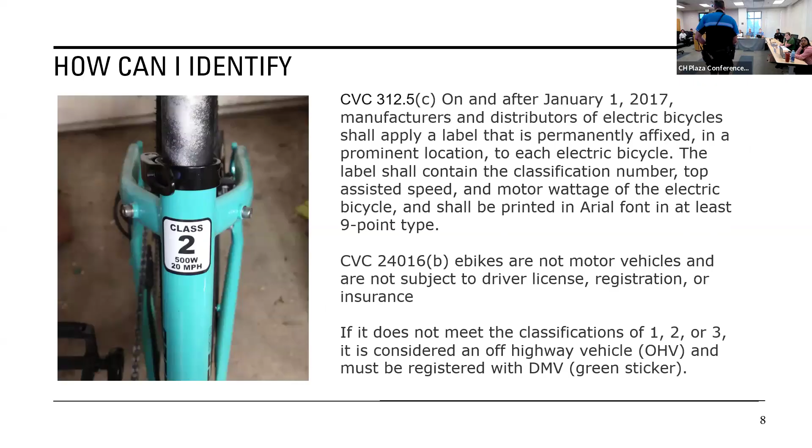We're also going to talk about the differences in where you can use these different bicycles. To identify them, the manufacturer is required to have a sticker on it. It has to be in that font, in a conspicuous spot, and it has to say what class it is, the top speed, and the wattage. However, these stickers are easily purchased online.

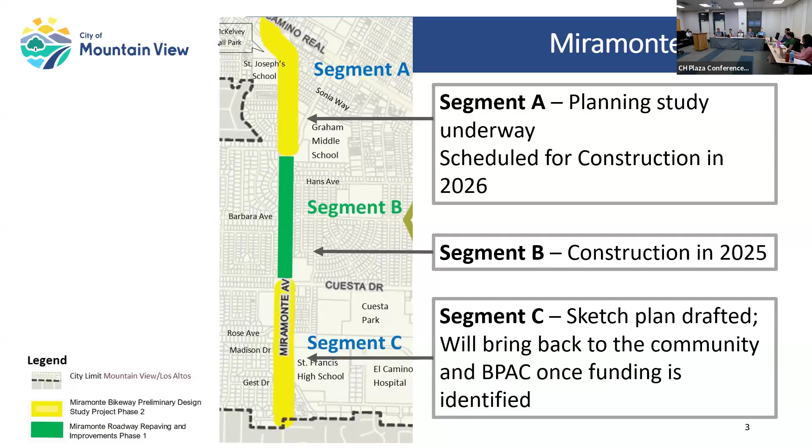Okay, next slide. Quickly some background: last year we kicked off the study with data collection and outreach round 1. Since then, we have completed preliminary concept design, data analysis, outreach round 2, and have developed a preferred alternative. Today we are here to receive your feedback on the preferred alternative, and we will take this to CTC on Tuesday for their feedback as well. Based on BPAC and CTC's feedback, we will bring the final report to council in fall of 2025 for approval.

and Bubb Elementary School. We kicked off the study last fall with outreach round 1 and data collection. For outreach round 1, we conducted a bike and walk audit, an interactive map survey, and hosted an open house. Through the outreach, we received valuable feedback and improvement ideas for this area. In parallel, we also conducted thorough data collection, which included traffic counts, speed analysis, traffic collisions, parking counts, and field observation.

Based on the data analysis, staff kicked off outreach round 2 during the summer. During this round, staff sought feedback on proposed parking removal, lane reduction from 2 travel lanes to 1 travel lane, and bicycle and pedestrian facilities along this corridor. For outreach round 2, we took these elements for public feedback.

Public outreach events included a citywide survey, pop-ups at nearby schools, and for notification of outreach, we sent postcards to residents, car flyers, yard signs, light pole flyers, and social media posts.

Through the outreach, we heard support for protected bikeways and pedestrian safety features. In the survey that is still open, results show over 55% support for the plan, and an additional 19% would support more protected bikeway. Of the respondents who were no or not sure, preserving lane capacity was the reason for not supporting it.

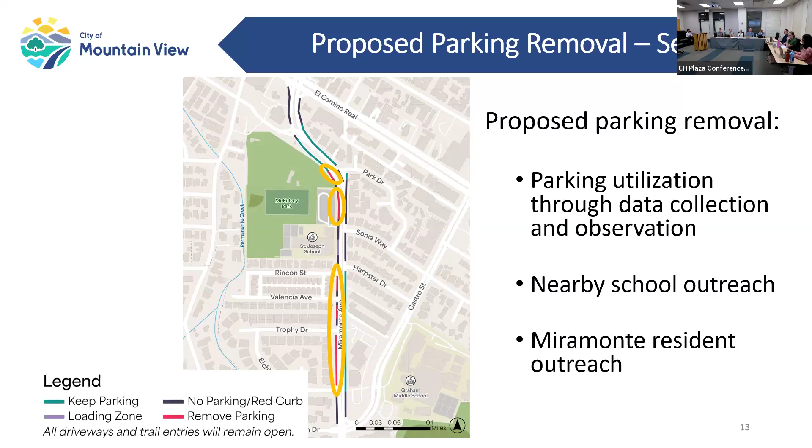Regarding parking removal feedback, through our survey we found that approximately 64% of survey respondents supported the proposed parking and additional parking removal.

Survey respondents also identified additional treatments, including new and improved pedestrian crossings, traffic calming measures, increased street tree landscaping, and improved street lighting. This plan includes these elements through mid-block crossings with rectangular rapid flashing beacon signs, traffic calming measures through travel lane reduction, and barrier and parking protected bikeways. This plan also reserves space for a Green Street for future funding, if future funding becomes available.

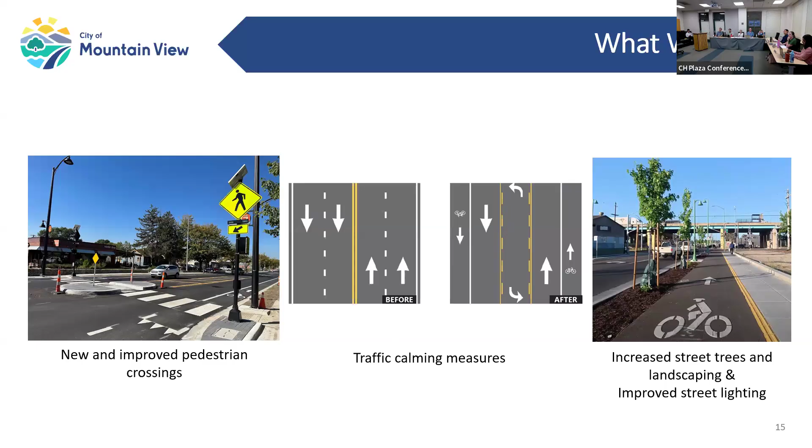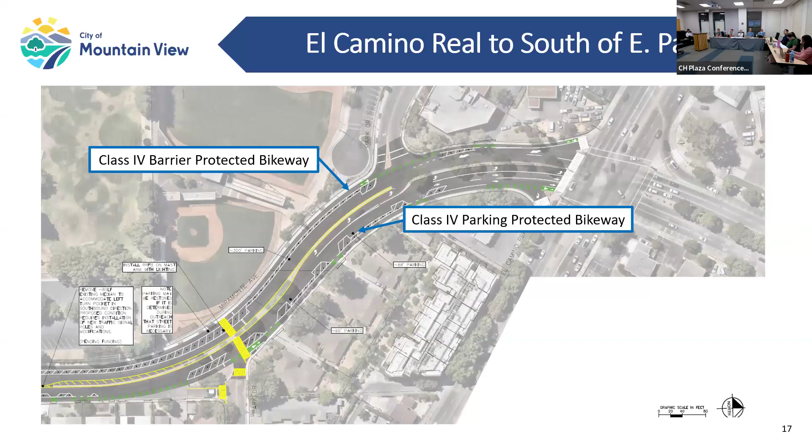Now to the preferred concept plan. This section goes from El Camino to south of Park Drive, where the west side of the street has Class 4 barrier protected bikeway, and the majority of the east side has parking protected bikeway. We also have a mid-block crossing at Park Drive with RRFB and green dash lines through the conflict zones.

This stretch is from East Park Drive to Trophy Drive. Similar configuration: the majority of this area has Class 4 barrier protected bikeway, and the other side has parking protected bikeway, with high visibility crossing at Sonia and mid-block crossing with RRFB at Trophy, and green dash lines through the conflict zones. The last stretch is from Trophy to Maryland, with Class 4 barrier protected bikeway and parking protected bikeway, high visibility crosswalk, and green dash lines through the conflict zones.

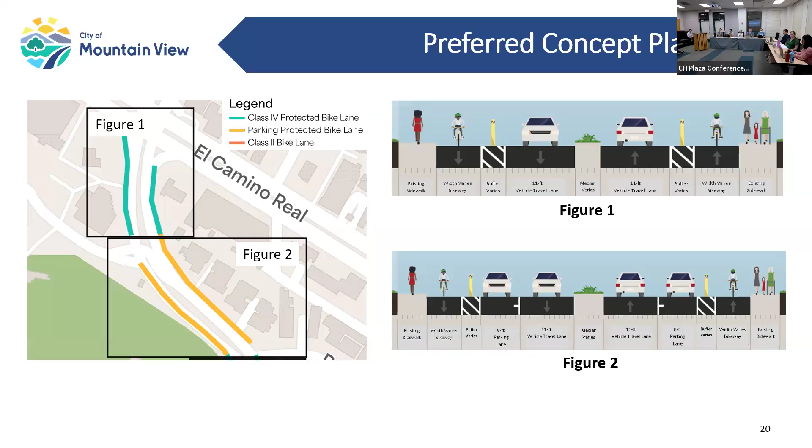To zoom in a bit more, this shows the same stretches with specific cross sections. This one shows an 11-foot travel lane where buffer and bike lane would vary as design goes on for this study. Similar to here, this goes from Park Drive to Sonia, and the vehicle lane will be 11 feet with buffer and bike lane to vary and be determined during the design phase.

The last stretch is from Trophy to Castro, from Rincon to Castro. This one also shows the vehicle lane to be 11 feet, with buffer and bike lane to be determined at the design phase.

An alternative to consider, where you'll be preserving more parking spaces, is keeping the existing bike lane configuration. So the bike lane will be along the curb, with parking along the curb, bike lane next to it, buffer, and then the travel lane.

So here we are. Today we are receiving your feedback. As Allison mentioned earlier, we will be going to CTC next week, and based on your feedback today and at CTC, we'll be bringing the final report to council in fall of this year. This will be ready for design by end of the year. So the recommendation is to review and recommend the preferred alternative concept for the Miramonte Avenue Complete Street Study from El Camino to Castro/Maryland Street to the Council Transportation Committee. All done.

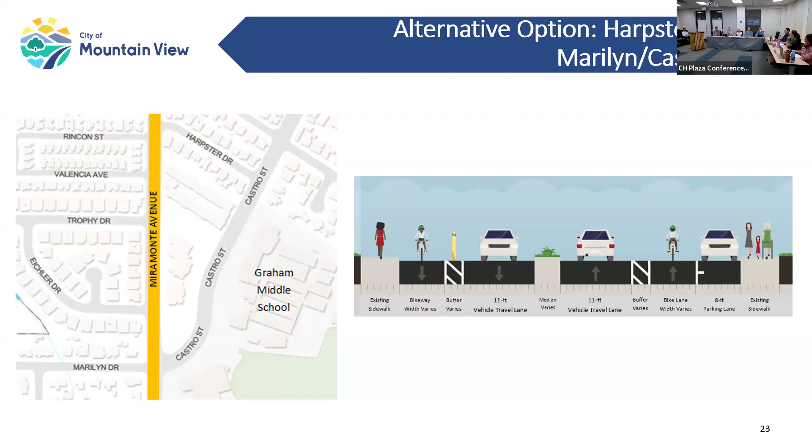Okay, and it would be only from Harpster Drive to Castro, and then it would switch, I guess? And then it goes, there's not parking, then it will switch to parking protected. I guess it will switch back at Harpster.

I can pull this one up. Did I go too far? Harpster. Yeah, it will switch between Harpster and Sonia, along here. So this will remain the same. Yeah, so it will pick up going towards Sonia, as you can see.

That's just driveway space from Harpster to Sonia, going northbound. They're going this way, and then it will pick up once it crosses Sonia. Yeah, so along here, it'll be parking protected.

I had another follow-up question. I noticed that some cross streets of Miramonte have marked crossings and others don't. I understand you showed only the markings of the one that had markings, but that doesn't answer my question, which is why is it that we have marked crosswalks and not marked crosswalks in other places? In general, it would be nice to be consistent, but that's my question.

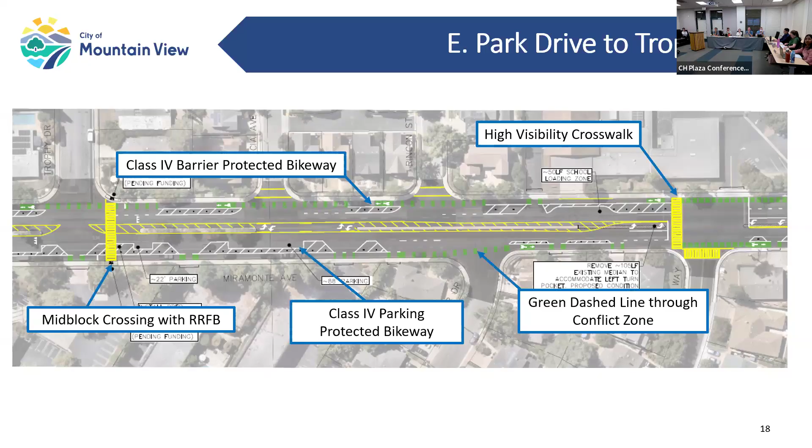Okay, thank you. And can you illustrate again where specifically?

So that's from right northbound Miramonte at the bottom - if you were to keep driving the vehicle straight, you end up in the slip lane onto Park Drive. That's the only way to turn onto Park Drive, because that other bit only has an outbound lane, at least right now. I don't know if you could accommodate a right turn onto it from there. I don't think so - I walked it this week and it's too narrow.

I don't know how often people accidentally drive straight at speed into that slip lane. That's something I was curious about, but not sure I have great statistics on it. Never seen anybody drive there. The traffic is approximately zero - no one drives there.

In terms of other questions, since we're on this view still - the other end of Park Drive. I believe at the prior BPAC meeting there were comments about being able to make logical lefts from that area onto northbound Miramonte. Is the reason that we're basically not touching that median as part of this project, if we can?

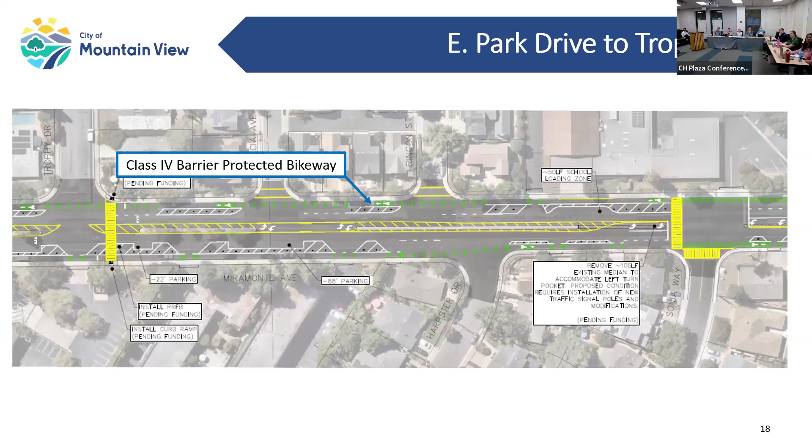There is kind of an access road / multi-use path that goes into Miramonte. I was involved with the neighborhood when it was redesigned as an access road, and we managed to make it bike accessible. But there's a need for trucks to access this for maintenance, for delivering hot dogs for the football and baseball games. It looks like it's not open yet - it will be, you'll see that gap, we just didn't catch that cut yet.

I had another question building on one I'd asked before. If you look at the top, on Park Drive at the level of the parking for the baseball fields, there is actually right now a loading zone meant for baseball players' parents dropping their kids, which made sense before the flood basin because kids could walk straight onto the field. But now they can't because that's underground, so they have to go all the way around and wind up where they could have been dropped off at the roundabout circle. In practice, that's not very used. So when I asked the question, the idea was to switch that loading zone on Park - which is really for baseball, not the school - into a parking area, and make the loading zone for baseball on Miramonte instead, because it would hopefully make things safer. That was the intent there, so I just wanted to clarify this.

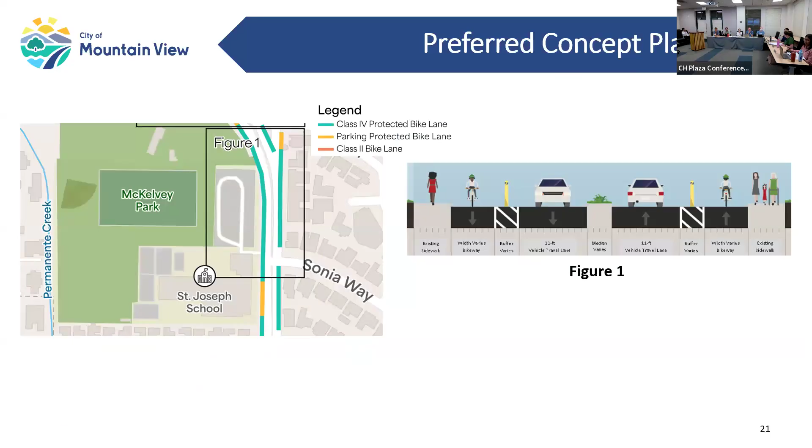So I'm going to start with the first thing I heard: to explore switching the loading and the parking at the ballpark, looking at parking on Park and loading on Miramonte.

Explore a crosswalk also around that location. Look at what the turning would be like, turning left onto Park there if you're coming northbound in the bike lane, so we'll look at the geometrics of that as well as we continue this.

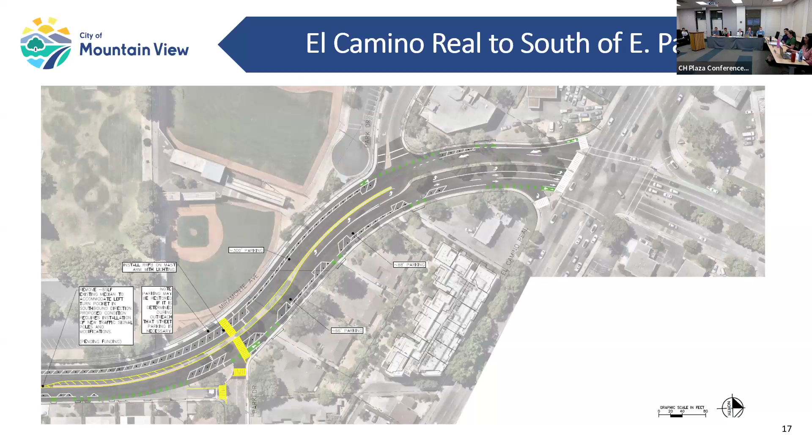Make sure that we capture the driveway and maintenance road that's at the end of the ball field, and explore a bi-directional bike lane there to the crosswalk at Park. Okay, I got it backwards.

Okay, then I have: explore the right turn on red on the next couple of cross sections as we go, for Sonia and Miramonte, Marilyn and Miramonte, and there was one more you said.

Well, I think Sonia Miramonte is also St. Joseph because it's kind of up there, yeah, a type of intersection. It's kind of a private drive.

And the driveway for this area I have for the no right turn on red, and explore that, as well as the example being at Harpster Drive. But for the right turn, make sure that we meet the code and requirements for the right turn, but minimize that as much as possible to tighten up the right turns across bike lanes.

Yeah, okay, did I hit everything?

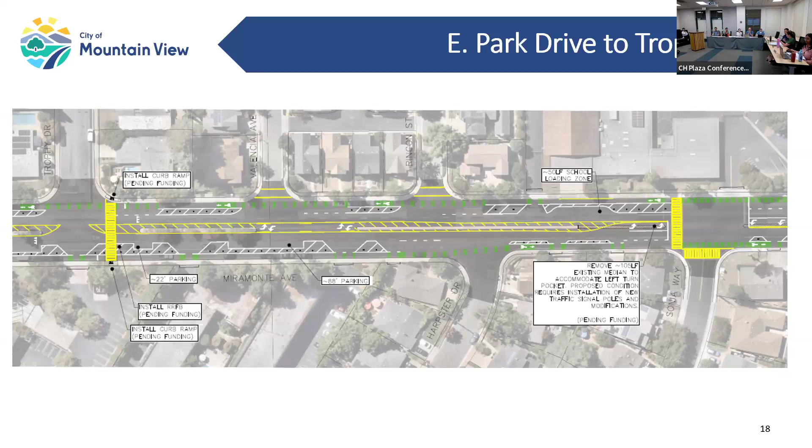Also thinking about loading zones, where we're going to put loading zones. Oh, that is a general note I wrote for delivery vehicles, stoppage and loading for delivery vehicles, because I think that's going to have to be a policy discussion. Yes, I wrote that as an ATP note. I'm not sure that has to, but yes, I got that one.

I know I was raising that, I say like, it's nice if that happens at the same time things go in, it's also not strictly, it doesn't strictly have to, but yeah, and that might help with some of our loading location shifts, so yes.

I just want to follow up on his suggestion. I think there is something also about the slip lane onto Park from there. I was raising that as a long-term thing, listing a few things I would like to see us talk about eventually, but I don't think they're in scope for this project.

It's not within the scope of this project, but we can add it to the radar for sure. Yeah, I think there is a lot of wasted space there, and if you want to do some greenery, it's probably a very good place to do it. Yes, again, I will have to go through the city attorney and everything else to vacate that right-of-way, but yes, I've got that.

And that one about right turns, was that just all right turns, not a specific location? Yes, I used that as the example, that's where I drew my circle.

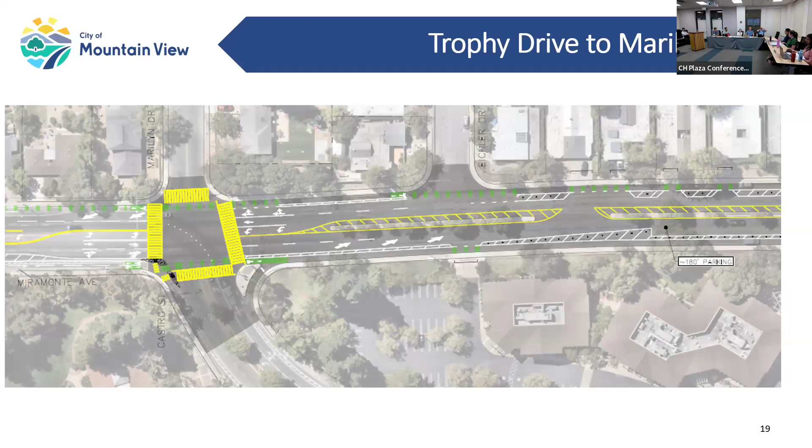Okay, so I think we'd agree the comments are summarized. Now can we get a statement of your view of the alternatives? I think we can do a motion and vote. Okay, are we ready for a motion then?

So for the record, we have Bonte starting with the motion and Vice Chair Kuzmal as the second. So the motion is in favor of the staff recommended alternative. We're ready for a vote. All in favor? Aye. So it passes, passes unanimously, 5-0.

Okay, so that concludes item 6.2. Moving forward to item 7, staff and committee comments. Was there any notices or presentation comments from staff?

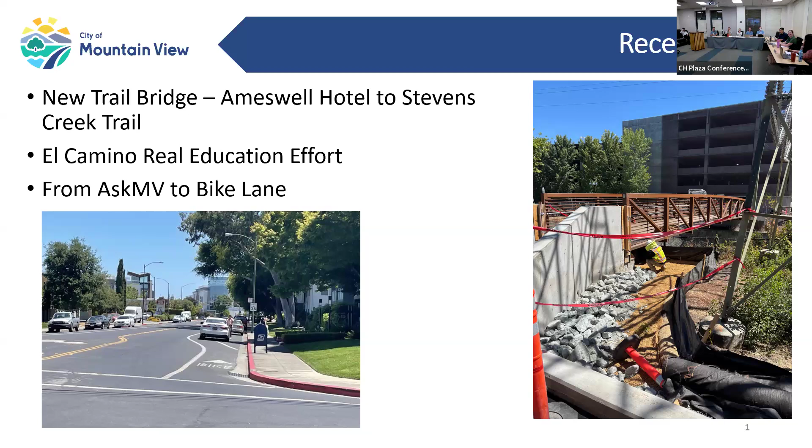And this was mentioned in prior meetings. Yes, correct, this is to close the loop - the work is done. And there's a car parked in it right now. Working on education. Exactly, full circle. So next slide, please.

Oh, happy season - it's back to school, and we've been fully engaged showing up at a number of our elementary, middle, and high schools, making sure to promote our Safe Routes to School programming. Last week we touched a number of these schools for ice cream socials and bike rodeos, and topped off the week with a bike to boba on Friday.

No, or was it earlier? Has it been a month, a couple of weeks? Oh, okay, earlier this month - sorry, it's been a long month.

So, how many students were in attendance for Bike to Boba? I think we had about 25. This one was the biggest one, and we handed out all of our bike lights. So it was a successful event. Next slide.

So we do have the Miramonte survey that's active. It does close at the end of this month, and we're asking folks post-BPAC to fill out the survey if they haven't already.

Lots of change and transition afoot in transportation in Mountain View. This week we received notice that transportation planner Aruna Buduna is resigning her post with the city and accepted a position with City of Campbell as a traffic engineer. So it's a loss. She's been with the city for about 6 years and was instrumental in shepherding the pedestrian mall and overseeing the interim improvements and the design and treatments for the permanent project. She'll be sorely missed, and we're thankful for her service.